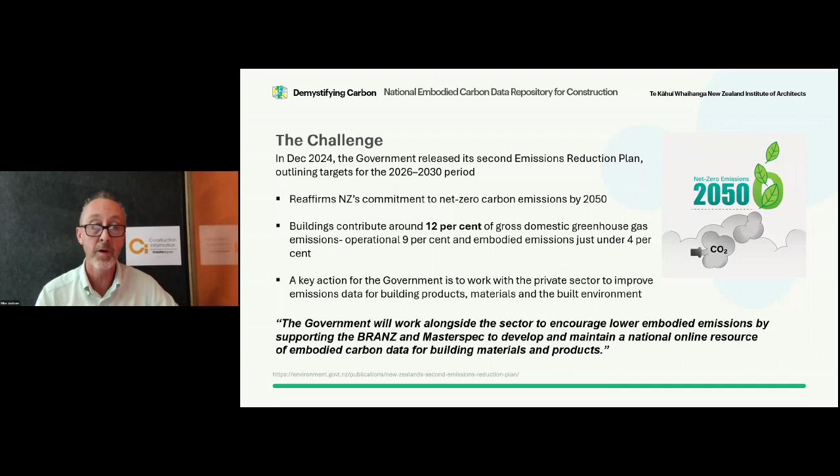Key action for the government is to work with industry to get this emissions data out there for building products and materials, for better decision making by the industry. The government fully supports the work that BRANZ and Masterspec are doing with this online resource for embodied carbon data.

About informed choices: the path to net zero relies on smarter material choices, efficient systems and integrated sustainability right from the start of the project through the whole process of construction to delivery and completion. This little diagram shows quite nicely the upfront carbon, where the influence is. Architects have a key role in this part of the process.

The other one just below that is engineers. This little graphic comes from Cove in the US, and they say low impact for engineers. We actually disagree. We think this might be a US slant on it, but in the New Zealand environment, engineers have a key part to play. We'd suggest structural engineers around concrete and steel, mechanical engineers around efficient air conditioning systems, electrical, etc.

So we see making these smart and informed design decisions right up front as key. The architects have slightly less impact through the operational side once the project's going through its life cycle. But then again, at the end, how the building is dealt with through deconstruction, etc., is another high impact point.

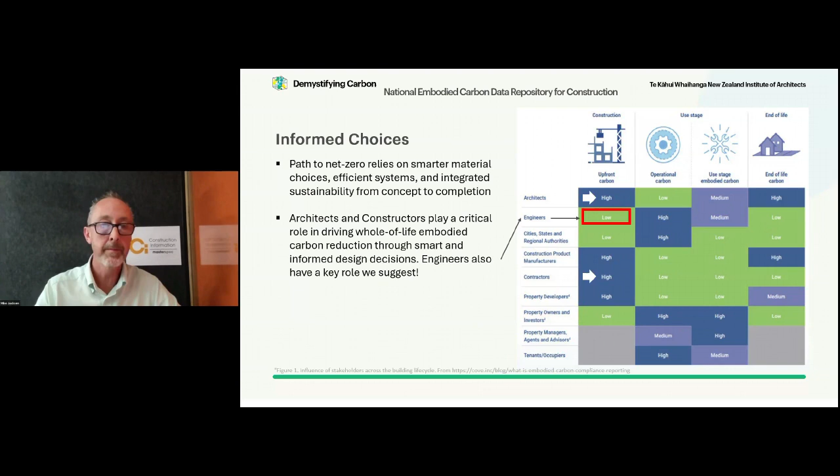So the CIL BRANZ partnership - we at Masterspec, CIL, felt this was a really good initiative. Our relationship with BRANZ has developed over many years, but really gone to the next level in the last year or so. We've got shared purpose, aligned values, and a commitment to a better built environment working together. The CIL collaborating with BRANZ with the MBIE endorsement on this project, we think is a great thing - getting a single trusted source for embodied carbon data for the New Zealand construction sector. It's been a little bit fragmented, everyone has a go. We're pulling it back to one source with government support.

It builds on the BRANZ data that's been developed, as we said, over the last 12 years, formerly accessed via CO2NSTRUCT, the BRANZ tool. From mid-2025, data will be hosted on our platform and maintained under a developed and agreed methodology that we've worked on over the last 12 months. The data will be publicly available for view around the same time, mid-2025.

The data will then be accessed via APIs, an abbreviation that we've heard thrown around - I had to research these things, so it's actually application programming interface. It's the bit on the data end that communicates with the tools that the architectural community will have access to, to do the calculations. It pulls the data through. The data is, as Rachel said earlier, free to access. It's open data.

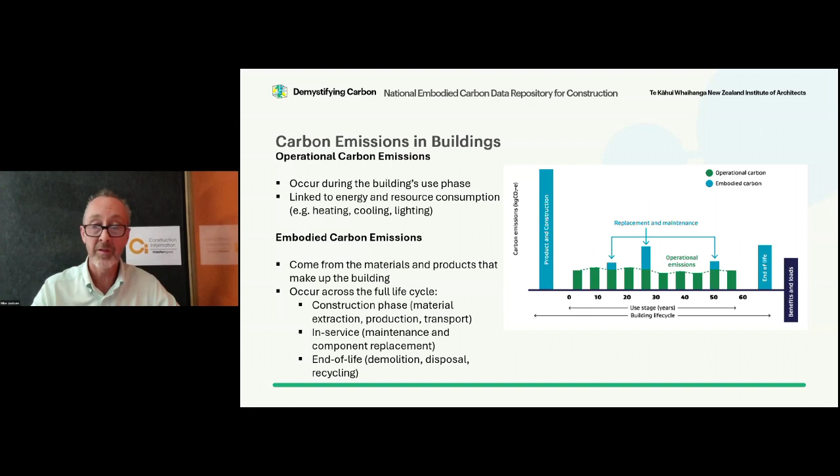So transport is such a significant part of these projects. 90% of all building materials, it's said, come from offshore into New Zealand. The transport factor is quite significant, moving those materials from the manufacturing plant through to the suppliers to the site. Distance, mode of transport and fuel type influence carbon impact significantly. Transport accounts for about 20% of all emissions in New Zealand, and the figures are growing, so that's a bit of an alarming number.

Building waste is another significant issue. If anyone's in denial about global warming, you can set that aside, but actually witnessing destruction, buildings being demolished and then pushed into bins, taken to landfill, we all see it every day. Changing that behaviour is such an important thing we can all make a difference in, on building sites and our documentation, things we think are desirable, and we can really make a difference.

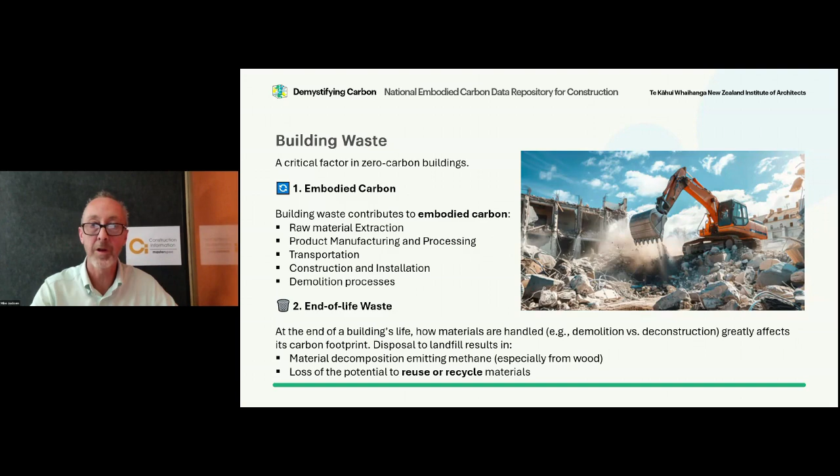So circular economy potential, there are some things here, if we can just think around designing for disassembly, using reclaimed and recycling materials, modular construction, very, very difficult to get off the ground in a big way in New Zealand. We've just seen Clevercore, the Fletcher company, announcing their closing. So we've got a huge number of challenges there.

One of the biggest ones typically is around cost and not making it cost effective. Keeping materials and products in circulation as long as possible, getting extended durability out of materials if we can. It makes these buildings last longer, which is great.

Waste really just equals carbon, it's as simple as that. If a building is designed to be zero carbon, but still generates a lot of waste during construction or demolition, it undermines the goal. A true carbon strategy is waste minimisation, smart material choices upfront and during the project, during the lifespan of the project, and these circular design principles.

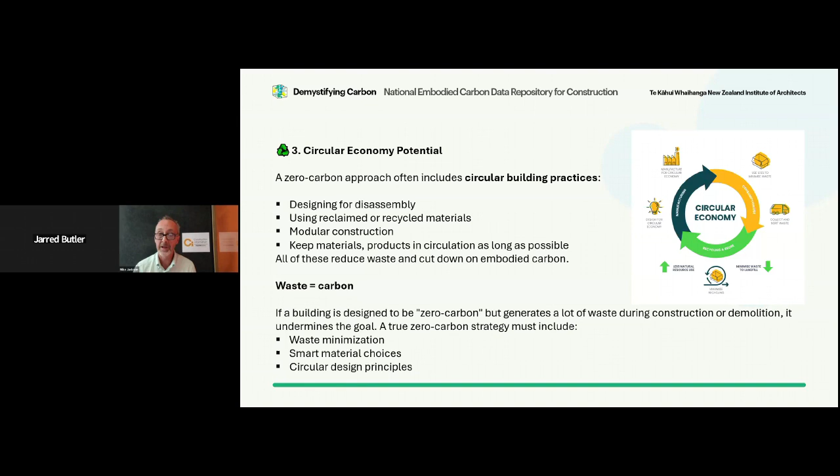So is carbon counting mandatory? Not yet. It's been promised it's coming. Regulation has been deferred, we're not sure how long, but it is coming, so we need to be prepared for it. And key things, consider sustainability early in the design process.

Late decisions or changes during the project will be costly. Basically, if you make a decision early on for a particular carbon footprint for a product or system, and then there's a substitution that someone has a bright idea to save some dollars, you'll have to go back and weave that through and make sure it's an equivalent or still fits within the carbon plan that you've put together.

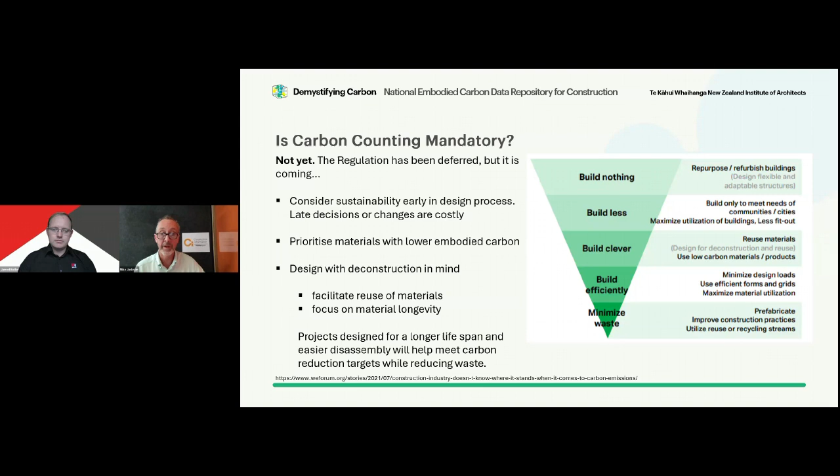Prioritise materials with lower embodied carbon. Design with deconstruction in mind. Facilitate reuse of materials if you can. Focus on material longevity. Projects designed with a longer lifespan and easier disassembly will help to meet carbon reduction targets while reducing waste.

Okay, I'll hand over to Jared at this point.

Kia ora, Mike, thank you for that excellent overview. So I'm going to go into a bit more detail about what we're actually doing with this repository and what it's going to be. And we're going to start by defining the specific problem that we're actually trying to resolve.

So ideally, we want the whole industry doing carbon footprint assessments, but unfortunately, doing carbon footprint assessments and life cycle assessments or any sorts of assessments like these can be hard and time consuming to do well.

So it's a very data intensive process. You need to know what materials are going into your building, how much of those materials, and have environmental impact data for each of them. And then if you're working on a big commercial project where you've got potentially thousands of materials, that makes it even more challenging.

And then, as Mike said, it tends to be best to do these sorts of assessments very early in the design process, when the design is still quite flexible and you can make changes. So you basically don't have most of this information during that time anyway. And then you also might be trying to upskill on this, trying to learn how to do these sorts of things, and it's quite difficult. And you're still trying to do your main job of being an architect, and you just don't have much time to actually do this. And it all starts becoming a bit overwhelming.

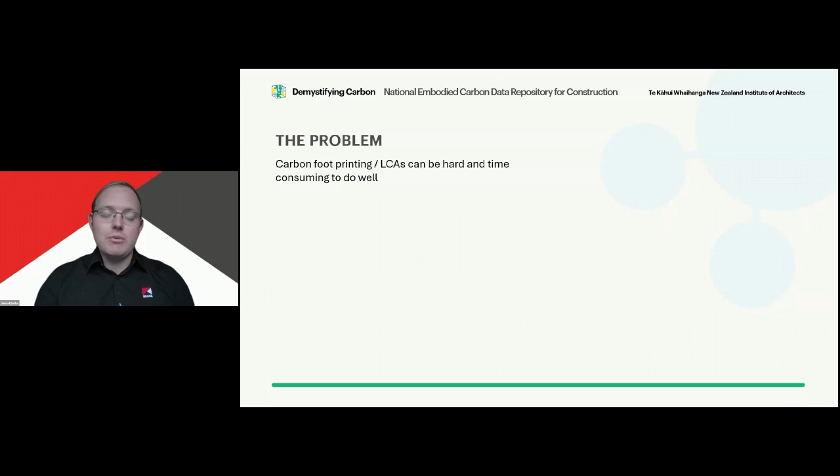So the way that, if you've been tuning into the previous webinars in this series, you'll know that we typically do these sorts of assessments using digital tools, which I'm going to be referring to as life cycle assessment or carbon footprinting tools throughout the rest of this. They're basically digital tools designed to make doing these sorts of assessments actually practical within the context of designing a building. And they're fantastic, they make the process a lot easier. They do a lot of great things, but the three key things that they do is...

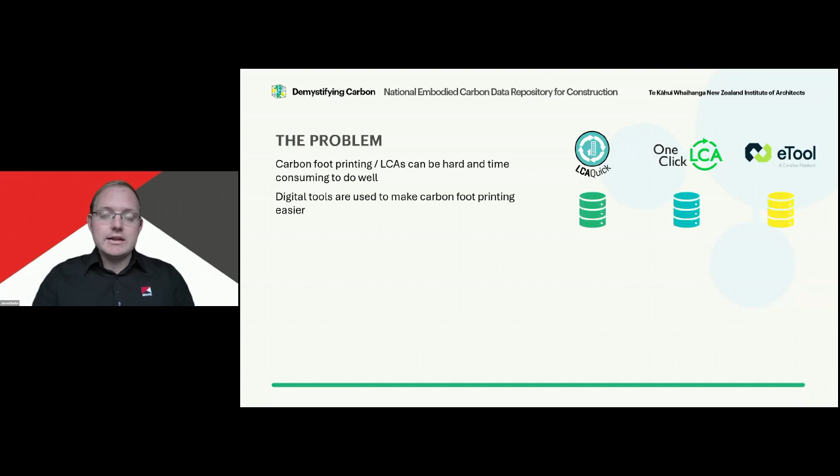Firstly, they collect a lot of environmental impact data for a range of different building materials for you, so you don't need to do that yourself. They automate all the calculations so that you don't need to manually do them. And they also visualize your results and present them in a way that's easy for you to interpret. So ultimately, you can use that information to inform the design of your building.

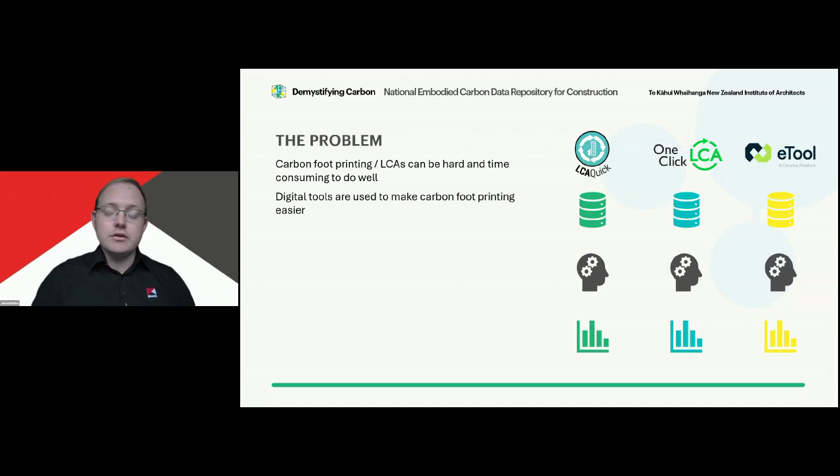However, there is a sort of problem with how the current ecosystem of tools is set up, and that's they all do this data collection process separately. There's a lot of assumptions that need to be made, and there's lots of things that could be done differently when you're doing this data collection exercise. And because each of the different tools are doing it themselves, they do some things differently, and that leads to inconsistency. So theoretically, you could model the same building in a variety of different tools, and you'd get different carbon footprints or different environmental impacts from each of those assessments.

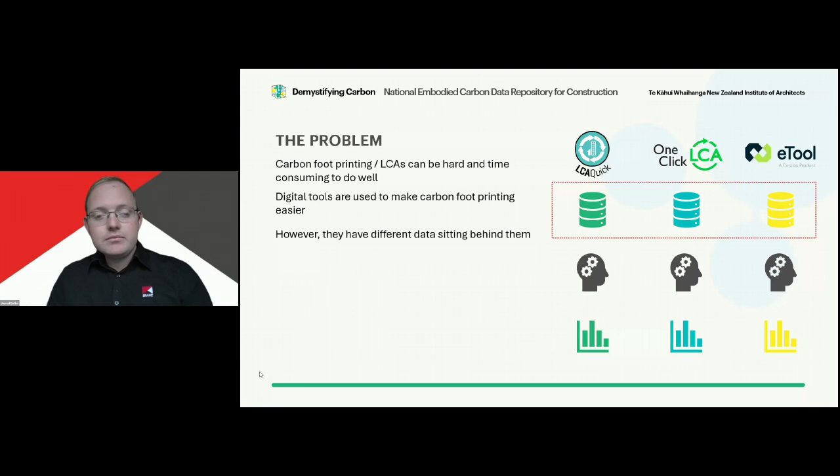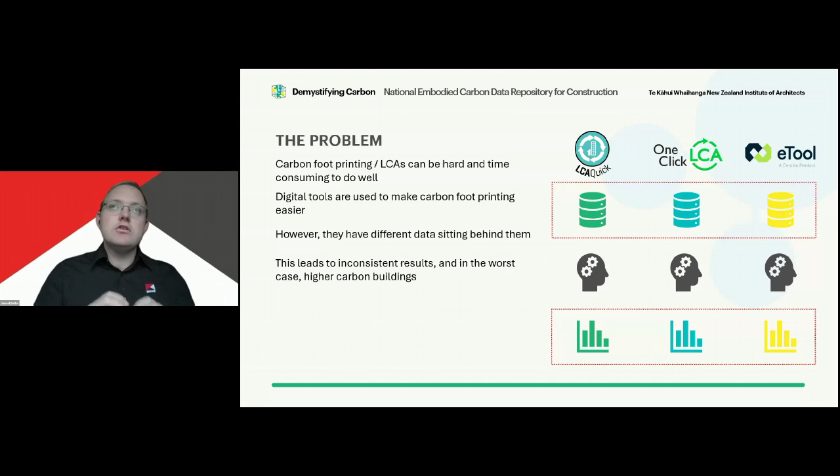So that has a number of problems, but the biggest problem is that when those differences between the tools are so significant, it ends up resulting in making the wrong design decision from a sustainability perspective, and the actual building that is constructed ends up releasing more greenhouse gases into the atmosphere than it could have otherwise. So it's really important to try and facilitate consistency and good data behind these tools.

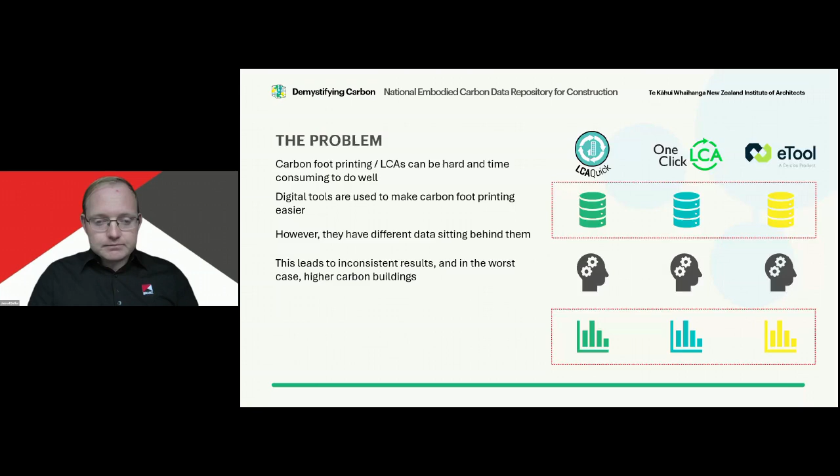So what is the actual thing that goes wrong with this whole data collection process? Well, the main source of data that we have for the impact of construction products are these documents called environmental product declarations. Basically, they're a document where a manufacturer is declaring the environmental impact of their products manufactured at a specific time using a specific process. They are fantastic. They're probably the best source of data that we have currently. And typically tools will take data from EPDs and import them so that you don't have to go and find the PDFs yourselves and try and process them yourselves.

However, there are a couple of challenges with EPDs. One of the big ones is that they typically don't report all the information that you need, especially to do a whole life cycle assessment from manufacturing to end of life. There's usually gaps, and when the tools import these EPDs, they basically need to fill those gaps. Additionally, there isn't an EPD for every single product that's available, and there's not EPDs available for quite commonly used products.

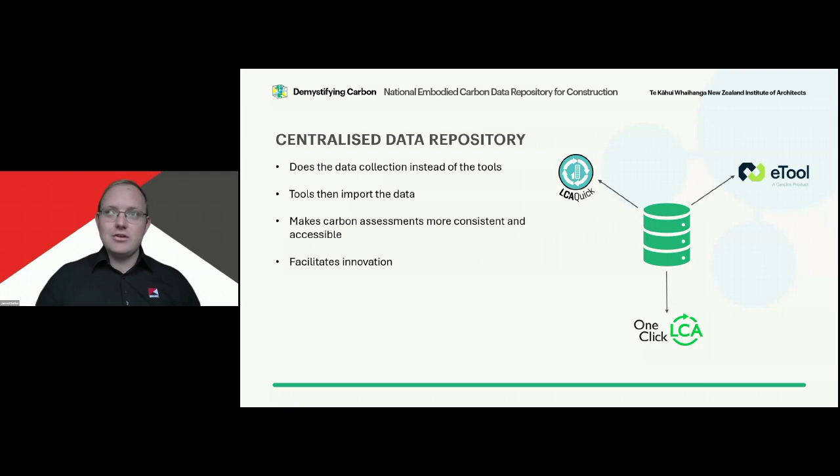These databases tend to collate information from EPDs, and they may also fill gaps by developing some defaults, which is proxy data. The advantage these ones have over us here in Aotearoa is that they have a lot more EPDs available, and they're developed specifically for the regions they're developed in. So the CO2 data, you can only really use it accurately in Finland, for example.

So what is the repository? We're essentially trying to do this sort of initiative and make it specifically for Aotearoa, and overcome those challenges of not having many EPDs available at the moment, and trying to help fix some of the inconsistencies that we've been seeing.

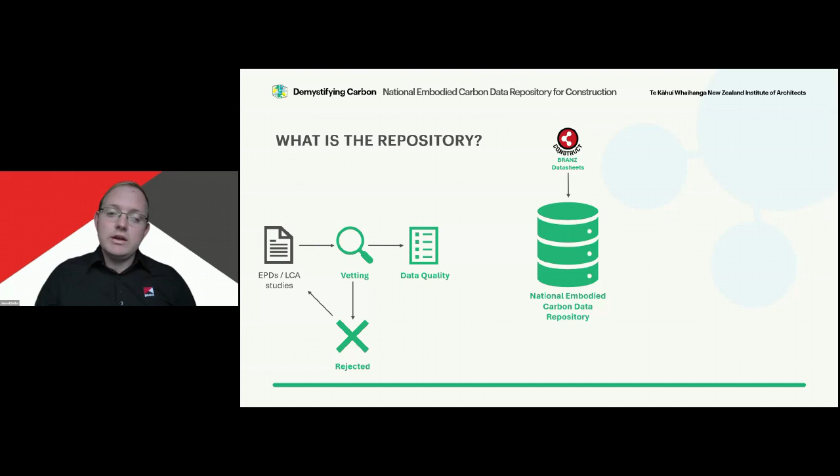Then once we've decided we're going to accept the data source into the database, we go through a data quality assessment. Part of trying to fill in the gaps and get enough data into the database that it has most of the products you need, we need to accept there's going to be some cases where we need lower quality data that may not completely represent the products in Aotearoa, but they are close. To help maintain transparency, we're rating the quality of that data, so you can see what's lower quality and what's better quality.

And then the last step is localization. This is about trying to make assumptions consistent, trying to make assumptions for future life cycle stages reflect the practices we have here in Aotearoa. That could be things like transport distances to site, construction waste factors, service lives for materials, end of life routes, recycling, reuse rates, all that sort of stuff.

Our vision is that a lot of the tools that you might already be familiar with and might even be using would start using this database, so it goes straight into those tools that you've already been exposed to. It's also going to be freely available. We want it to be as accessible as possible because we want people to use it. It only really works if everyone's using it.

It's going to cover the entire building life cycle from manufacturing to end of life, including Module D, if you're familiar with that. And we also want it to be as transparent as possible.

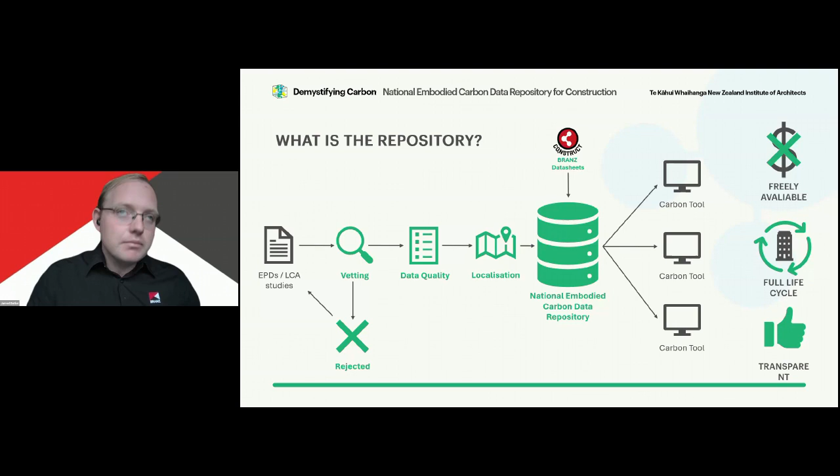So just going through those three steps in a bit more detail that we use to import and add new data to the repository. The first one, vetting, we essentially have a series of qualifying criteria. These are the minimum requirements that need to be met. These are a draft at the moment—they could change. I'm just providing them as an example.

So is the data freely and publicly available? Is it relevant to Aotearoa? Is it a product that's actually used here? Does it comply with the relevant standards that we need it to? Has it been externally peer reviewed? Does it at least report the manufacturing emissions? And it can't include offsetting.

Then when assessing data quality, I'm not going to go into too much detail, but just so you have an idea what we're actually doing here. Essentially, we have four indicators for data quality, which focuses on methodology—that's essentially compliance with our preferred standards.

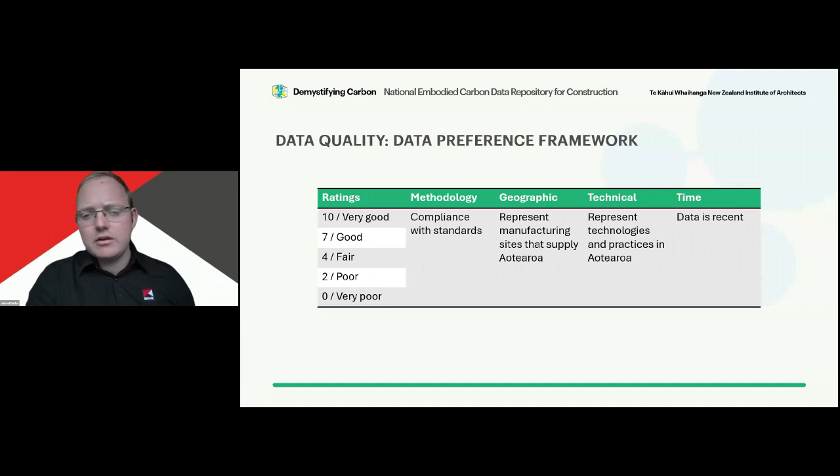Geographic: is the manufacturing site that the data represents one that actually supplies Aotearoa? Technical: do the construction practices reflect what actually happens here? And how recent is the data, because as data gets older it becomes less relevant as manufacturing processes and construction practices change. Each of those are going to get a rating from 0 to 10.

So then on to the localization step. Essentially we're developing a broad set of default assumptions and emissions data that we can apply to future life cycle scenarios—that's everything after manufacturing onwards. We're going to use those to fill data gaps, and they're going to be specific for Aotearoa, meant to reasonably accurately reflect what we actually do here.

And so we're actually going to use them to assess whether the assumptions made in EPDs are actually realistic. And if they're significantly different from what the defaults are, and they haven't provided robust evidence to suggest why that should be, then we may just reject those figures in the EPD and instead use our defaults.

So just to give you an example of one of these localization things we have to do, because I know this is a topic some people are interested in, where we have to do some localization for biogenic carbon. To give a very simple overview: biogenic carbon, as it's defined in the primary standard we follow, EN 15804 plus A2, is when carbon dioxide from the atmosphere is sequestered or taken out of the atmosphere from things like trees when they're in a sustainably sourced forest and it's been certified with an FSC or PEFC certification. That carbon dioxide stays locked within the timber or other plants.

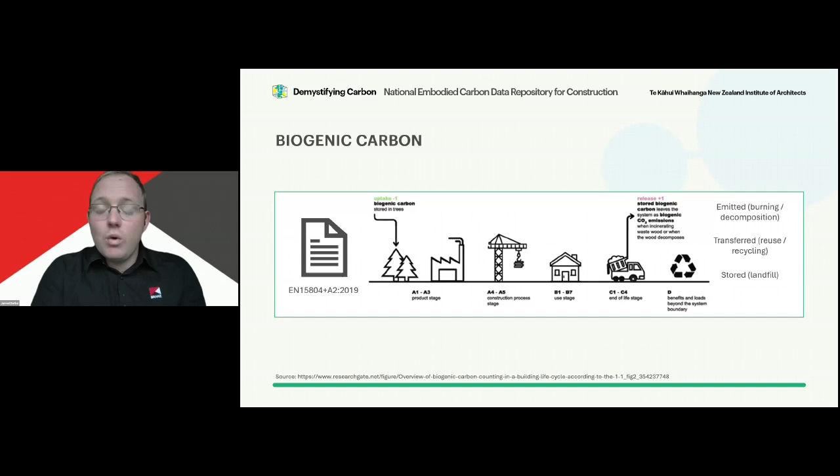So for example, within the repository, we're adopting a different approach to account for this, based on an approach done by RICS. We're essentially splitting C3 and C4 into C3.1 and C4.1, which accounts for the emissions that are actually emitted, the carbon dioxide that's actually released. And then we're reporting different numbers for carbon dioxide that leaves the system boundary of the LCA but is not an actual emission.

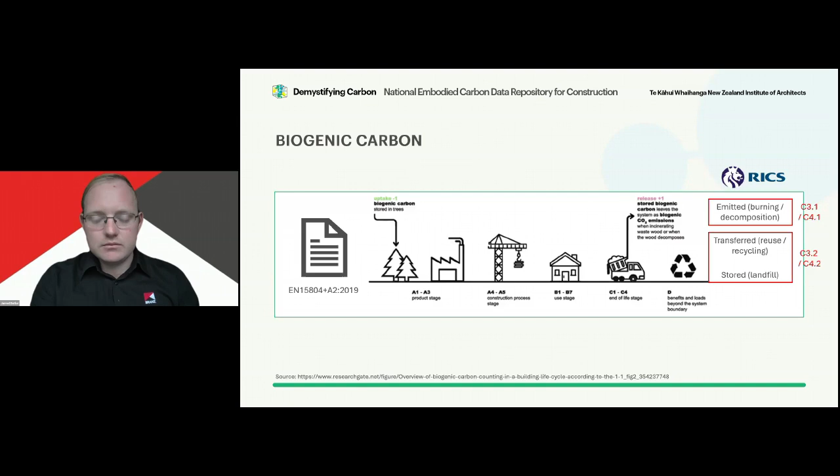So what have we been doing and where are we going? Here's a bit of a progress update. So far we've reviewed BRANZ's data and invited industry to submit new data. We've gone through line by line through BRANZ's data, interrogated it, had to find a lot of alternative data sources, and updated it.

It's been a lot of work, but that process is essentially complete now. Currently, we're building the database itself. We're also further refining the data preference framework and developing the defaults we're using to fill data gaps. The next steps are to populate the repository once the database is built. We're planning our first release, the initial or beta version, in mid-2025. We want to establish a governance group so it's not just BRANZ or CIL guiding this thing—we want industry to help guide it too. We're developing APIs so that tools can use the data.

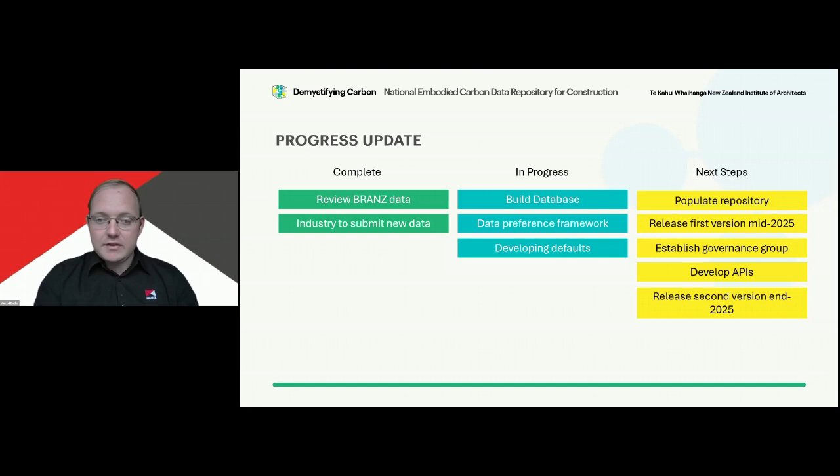It's great putting data out there, but we want this to have an actual impact and drive sustainability within the construction industry. Ideally, it helps facilitate consistency among carbon assessments by having the data available and making it easier to do these assessments. More people start doing them, and it makes it easier to do carbon footprinting. If more people are doing it and understand how to do it properly, then ultimately we get to lower carbon buildings.

But the other impact we're hoping to have is driving sustainability within manufacturing. Having all manufacturers' data in one place makes it more transparent and easier to compare. Manufacturers want to publish their data in the database—we've already had some contact us about that. That leads to more sustainable products being specified, because there's a range of products within the database and people are specifying the lower carbon ones. And then manufacturers have an incentive to decarbonize their products so they can stay competitive.

So finally, what can architects do? What can you guys do to help with this and really push for change within the industry? First, provide feedback on the repository once it's released. We want you to tear it apart and critique it as much as you can. We know we're not going to have absolutely everything right, but we'll get to the best version of this thing if we all work together.